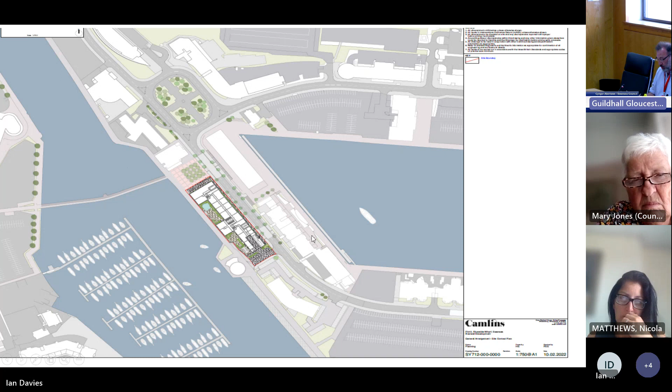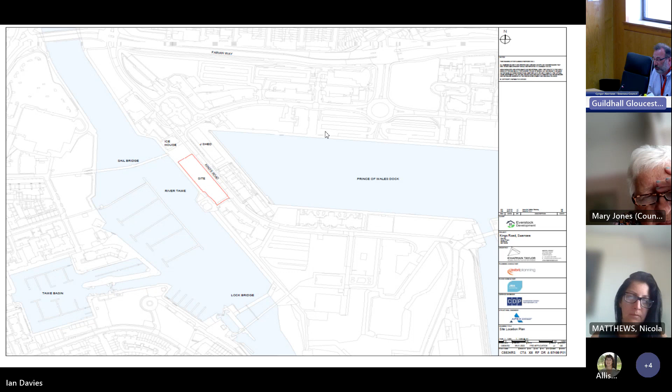Okay, so if you go to the next slide, Ian, please. It's just I'm not sure we can read that. Similar type of image, ignore that - similar image. It just gives a bit of annotation in terms of site context for the surrounding buildings. If you go on to the next slide, Ian, please.

And there we go. So there's an aerial image, site edged in red, and you can see the context with J Shed, Altamar, commercial building, and Ice House, sail bridge, etc., overlooking the site. So it's a development site in SA1.

It has been granted planning history previously. In 2006, that permission was actually implemented, and we'll go on to show that in a minute. So this application is an outline application, residential development with some commercial element to the Ice House Square. Outline, with all details reserved for reserved matters approval, but it's been submitted in support with lots of illustrative drawings, parameter plans, and some CGIs, which we will present to you in a little bit.

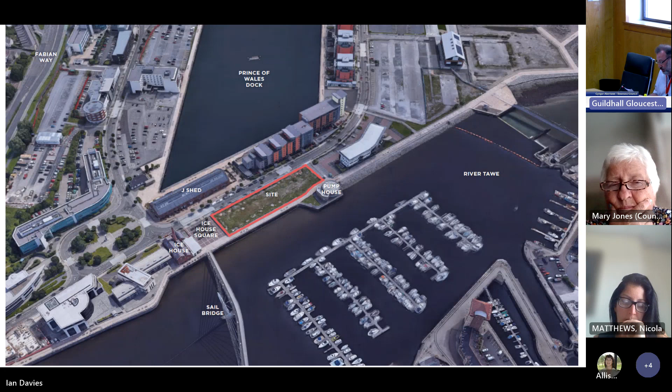So whilst this outline, residential has up to a maximum 104 dwellings, a commercial unit overlooking Ice House Square with an undercroft basement car parking up to 93 car parking spaces. If you go to the next slide, Ian, please.

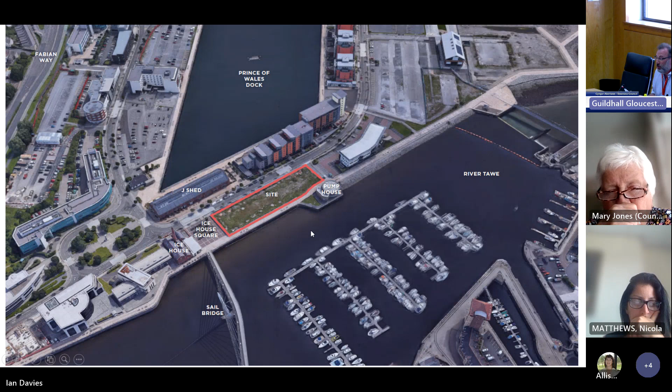And there we go. So you can see it's a hoarded site, brownfield site in SA1. You can see the hoarding, and its proximity to the Riverside Walkway. And then you've got the Ice House and the J Shed red brick buildings in the background. And the next slide, Ian, please.

So this is the approved 2006 permission, which was, I think, 91 units. Again, it had a commercial element facing onto Ice House Square, and it ranged, as you see, between 4 stories to a maximum of 11 stories towards the south. So that development actually commenced in 2008 when they did some piling works, so that's a live extant planning permission which could be implemented, but it's not currently proposed to do so.

The existing permission is a material planning consideration, and it further emphasizes the development value and principle of development on the site. The site is within SA1, allocated on the master plan as a residential site with some commercial elements in accordance with what's been submitted, showing residential land use with development up to 11 stories, compliant with the overall outline master plan permission.

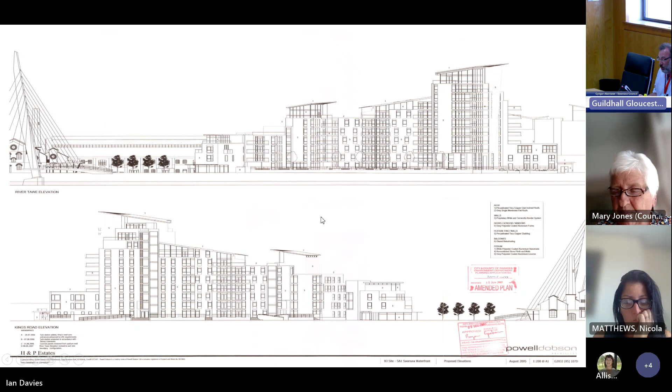It's supported by illustrative drawings as an outline scheme. That is the illustrative layout for the ground floor. The blue element is the commercial cafe use, which will face onto Ice House Square, and the yellow blocks indicate residential at ground floor. The green areas are the podium private landscaped areas, elevated above the walkway to give a strong podium public-private definition from the walkway.

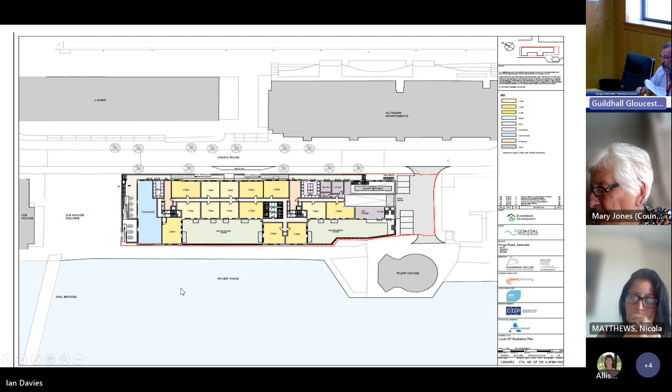The basement access is to the south of the site. And the next slide, yes, that's the parameter drawing.

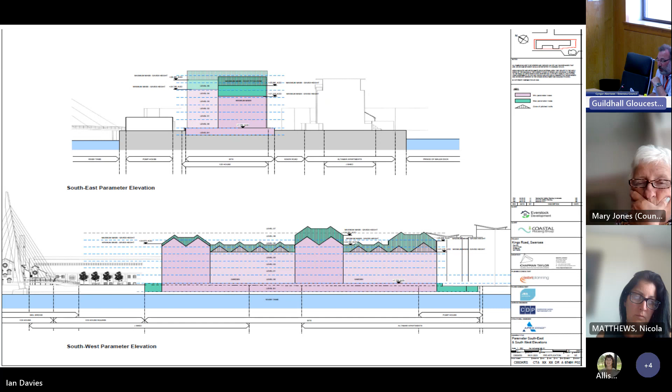That shows the maximum height which the development will be allowed to go to. Based on the illustrative layouts and maximum footprints, it's estimated that the development will accommodate a maximum of 104 dwellings. And the next one is an illustrative elevation drawing, and we'll go on to the CGIs in a moment.

It's in SA1, and the principle of development is firmly established by local plan policy. It's in the strategic development area, an allocated site for residential development, and its provision of 104 Coastal Housing Association affordable housing units would be in accordance with development plan policy and are welcomed in this location, given there's a general outstanding demand over and above supply of affordable housing.

If we move on to the placemaking aspects, it's been assessed in detail within the report. We've assessed it against our residential SPG, and it shows how the scheme has evolved against key placemaking objectives, which is outlined in detail in the report by our council's placemaking and heritage officer.

The site is in a sustainable location within SA1, with lots of local facilities within walking distance. We've got the promenade, Sail Bridge access, and it's close to public transport and the city centre within walking distance as well. It's got an urban density which is welcomed at this dockside regeneration location, and the proposed scale is in accordance with the master plan.

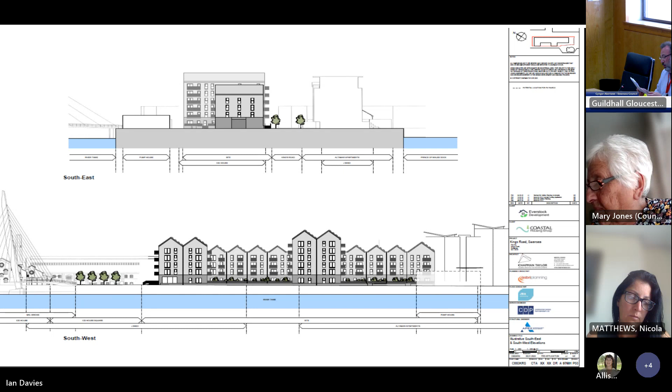So if we go on to one of the CGIs, please. There we go. This is a computer-generated image of what the development should look like, subject to reserved matters approval, in accordance with the illustrative and parameter plan submitted with the application.

In townscape terms, it's 4 stories rising to 6 stories in the middle of the site, giving a bit of interest at roof level so it's not a uniform development, and tending to break up the mass of the building. The extant permission is for development up to 11 stories, so that's an important consideration.

The elevations would incorporate strong, robust brick finishes referencing the listed buildings of Ice House and the J Shed, so it's been designed to be appropriate to its context. You've also got the gable references, typical dockside architecture mirroring the warehouse development typically found in a dockside location. In key placemaking terms, the scheme is supported and welcomed.

Heritage is addressed within the report. There are a number of heritage assets within and adjacent to the site, in terms of the setting of the J Shed and the Ice House, which is also listed, and also the Maritime Quarter Conservation area, which is on the opposite side of the road. That's been assessed in detail, and the scale of development and finishes etc. are deemed to be appropriate.

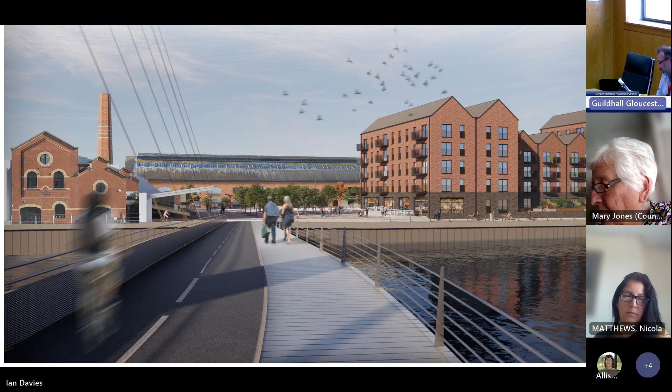There is an image we haven't got on the presentation, of the lay-by on Kings Road, which allows for refuse and delivery collections. Concerns were expressed by our highways officer previously, but it's been designed in accordance with requirements. It will be subject to a Grampian condition to control the detail and to amend the existing TRO in the area.

So that will all be catered for. As I say, basement parking provides 93 spaces for 104 residential units, so it doesn't provide 100% coverage - it provides something like 90% coverage. But this is in a sustainable location within walking distance, and to maximize the urban density appropriate to SA1, the car parking provision is deemed appropriate. This would be in accordance with the development plan, Future Wales, and Planning Policy Wales guidance on car parking outlined in the report.

That's to minimise car parking in sustainable locations, so it's in accordance with development plan policy. The site is adjacent to River Tawe, and the flood risk has been assessed by the flood consequences assessment, and is deemed compliant with the existing version of TAN 15 Technical Advice Note on Development and Flood Risk. The development has been designed accordingly, with a finished floor level appropriate to the flood risk, and it's compliant in that respect.

Contamination - there has been reference to contamination. Local development plan policy constraints map identified the site of historic contamination from the past industrial use of the docks, but that's been subject of lots of studies, and is not deemed to be a current risk subject to particular site investigations on this plot.

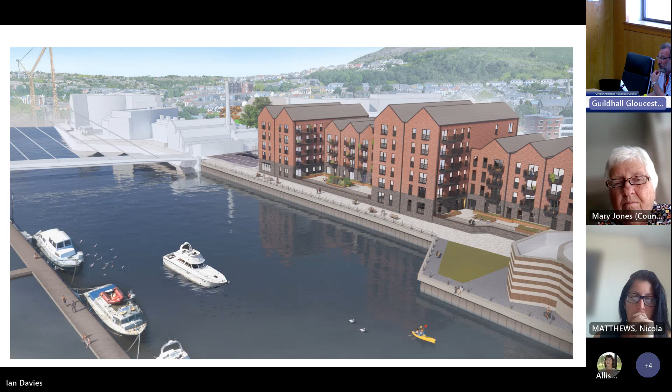So in conclusion, Chair, this is an allocated site within the SA1 development for residential development. It accords with the master plan guidance for land use and scale, and provides an important provision for affordable housing. As I say, if we skip to the CGIs, Ian, there we go.

And I think that's the last one, isn't it? Yeah, so that shows the site in context, and you can see the relationship to the ice house, J shed, and the Altamar building to the rear of it. So it's a strong gable frontage, dockside architecture, which is deemed appropriate for this location, supported in placemaking terms, and compliant with development plan.

Thank you, Chairman and Committee, for the opportunity to address you today in relation to this application for the construction of residential development and associated parking and landscaping at Site B3 at Swansea waterfront. This outline application has been thoroughly examined in relation to the development proposed, resulting in no objection from any of the statutory consultees and a positive recommendation from your professional officers. The officer's report is transparent, balanced, and well informed, providing a reasoned justification as to why the application is considered acceptable.

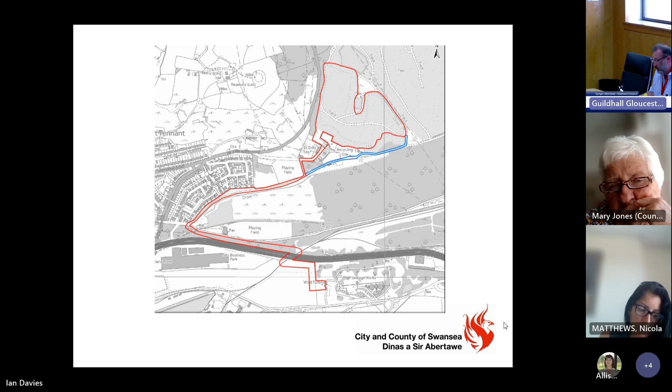The development involves 5,500 solar panels, and also a private wire connection which will export the electricity to Swansea Waste Treatment Works, crossing underneath Fabian Way, which goes underneath an existing railway bridge, over Fabian Way. If you go to the next slide, please.

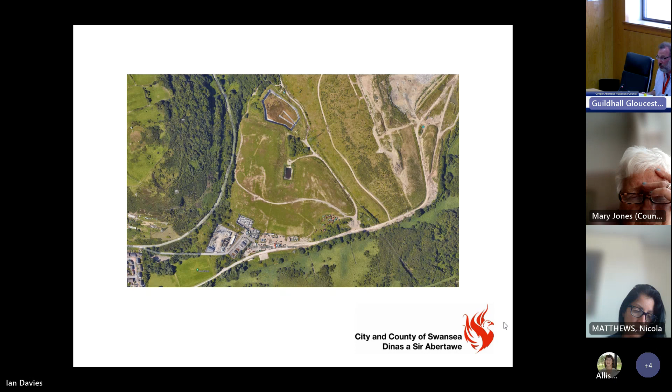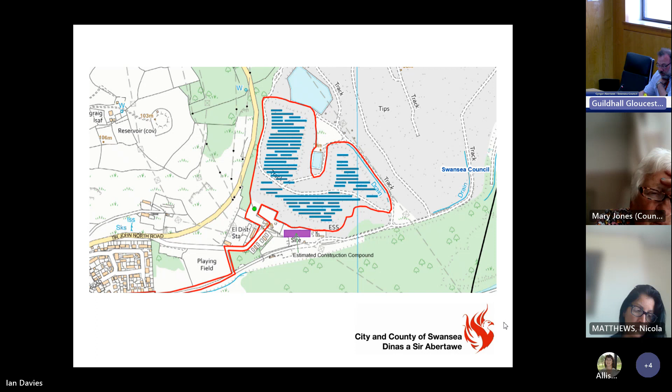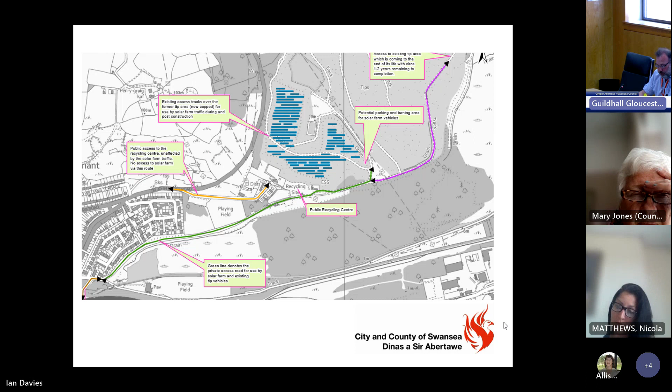So in terms of the scheme itself, it's principal development with strong political support. This is a council application, so the council have aspirations to be net zero, so it'll be a contribution towards that. There's also strong planning policy guidance in terms of support for renewable energy, both through Planning Policy Wales and Future Wales National Plan Policy 17, which encourages renewable energy, to meet the Welsh Government's commitment to try and generate 70% renewable energy by 2030.

All the planning policy Wales guidance is within the report. In terms of the Swansea local plan, there's policy RE1, which supports renewable low carbon energy developments. With solar farms in particular, it identifies search areas predominantly in the north of the city, around the Felindre, Pontarddulais area, so this site is outside that. The policy is mainly directed at solar farms between 5 and 50 megawatts, and this is 3 megawatts, slightly below that threshold. Nonetheless, the policy is generally applicable in terms of criteria for assessing the project, and there's widespread political and policy support for renewable energy at both national and local level.

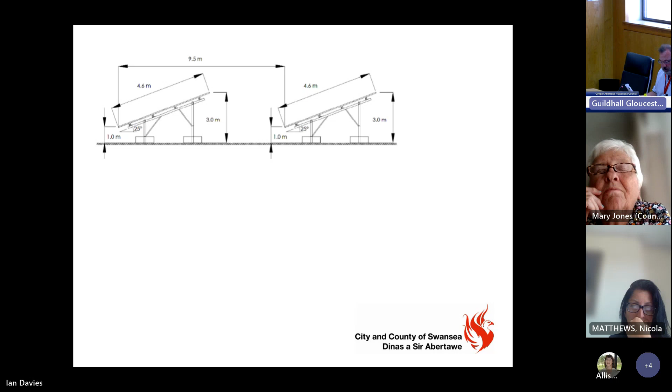It identifies what's referred to as a zone of theoretical visibility, identifying a 2-kilometre radius of the site, and a number of viewpoints from where you can potentially see the site. The conclusion of the LVIA is that whilst there will be some visibility across the wide area, having regard to existing vegetation, topography etc, and the low-lying aspect of the solar panels, it's not considered to be a detrimental impact in terms of landscape and visual impact.

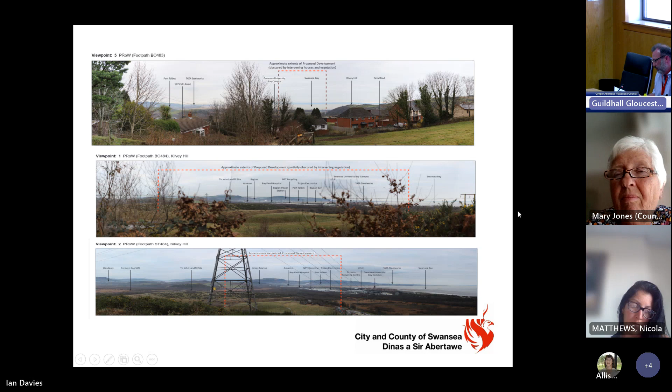Yeah, thank you, Chair. Very happy with this. Just one question about on page 38. As I understand it, this is a former landfill site which has basically been filled and landscaped on top. So I'm interested in the high risk of unexploded ordnance which is referred to. Where are we likely to find that, given that this has already been dug up once and re-landscaped?

Interestingly, alongside in the Ramsar site and the Crymlyn Bog site, there are still the anchors for barrage balloons. I can believe it, yeah. And will there be particular provisions being put in place to ensure that we don't actually blow ourselves up while we're putting these in?

Yeah, just a query, Chair, in regards to there being none because of what's been there for many years, and the people of the community having to put up with it over there. Is there any sort of possibility of giving some support to the community trust in the way of a Section 106?

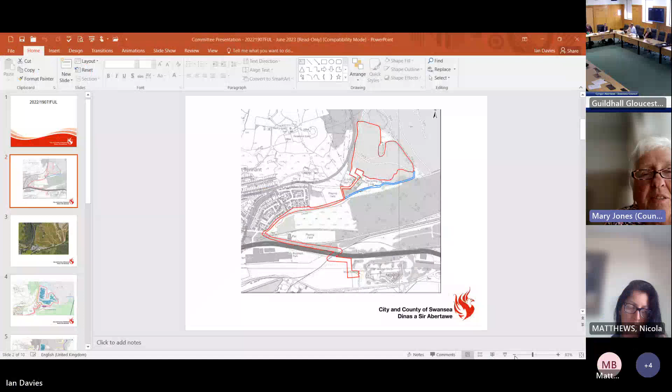Yeah, my question's similar to Councillor Downing's, but can we have the slide that showed where the actual power is coming out? Because the water treatment works is almost up by Baldwin's Bridge, which is on the border, as we know, between Neath Port Talbot and ourselves. And yet the access road into Tir John is opposite McDonald's. And when you looked at the first slide, it actually looked as if it was coming out there. So I was a bit confused as to where it was coming out.

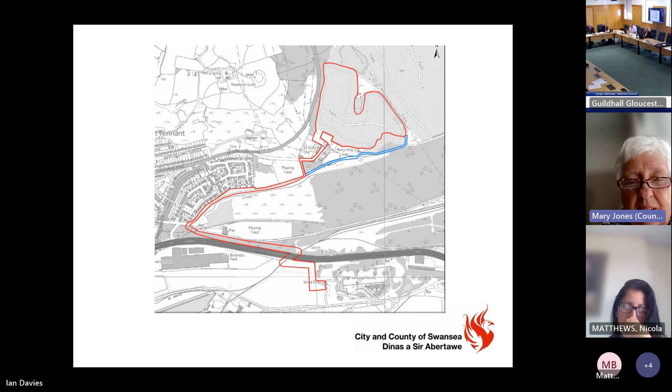So if somebody could tell me that, because the houses we can see - and I'm sure Councillor Lloyd, you know the area probably a lot better than I do. The only thing I did was plant trees around the playing field when I was Lord Mayor. But it does seem as if it's down too low to go to the treatment works. So I'm wondering how this works, because I can see where you say there, so it's coming underneath the road all the way up and then across just by Baldwin's Bridge, I take it. So perhaps somebody can reassure me that it's not going all the way along Fabian Way and we're going to have a load of hold-ups while they're doing it.

Okay, thank you. Yeah, we'll come back with that now then. Anyone else? No? Okay, few things.

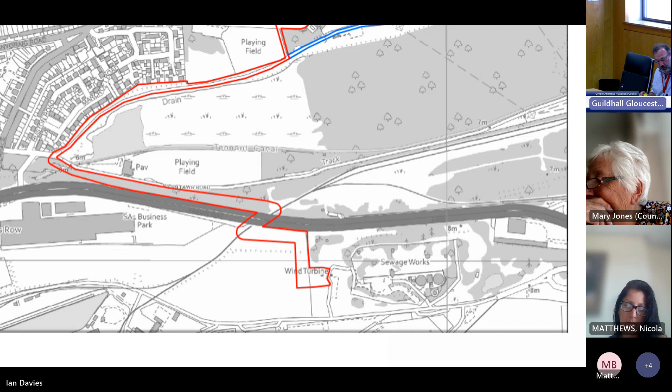Regards Councillor Black's point about the ordnance - I think, yes, obviously it is a landfill site, and you'd have thought that any ordnance would have been discovered a long time ago. I think that's been picked up in the desktop study. It's been identified as a potential risk, if you like, but I think in reality, mostly on this capped site, you'd have thought that if there was anything, it's already been discovered and discarded. Having said that, there are conditions on the recommendation for a more detailed investigative study to be undertaken, so that's one of the issues that will pick up effectively.

So I think there's also widespread questions about community benefits. Obviously, as I say, this is a council application. There was a specific question about section 106 - so yes, as a council application, we can't impose a section 106. But in terms of general community benefits, obviously there's a benefit. Whilst there might not be a direct benefit to the local residents per se, obviously it's a council development, so...

The electricity, the revenue cost from that electricity which will be sold effectively to Welsh Water in this particular instance, that money will obviously come back to the council. What we do with that isn't part of this planning application, that's a wider consideration. So if you like, there is a community benefit being derived through the council by actually selling renewable energy. There are wider benefits in terms of carbon offsetting, and it contributes to the wider aspiration of the council to be net zero by a certain date. So there is a community benefit, even though it may be a wider benefit rather than a particular local community benefit, if you like.

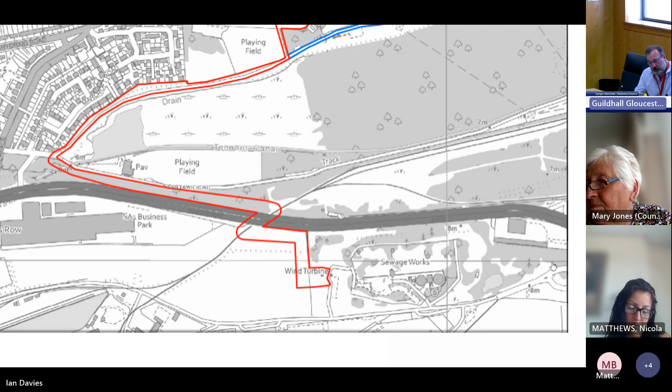Cool, thank you very much. There's no other hands to speak? No. Okay, thank you, David. And then so we can - sorry, yes, I was saying, the recommendation, as David said, is to approve.